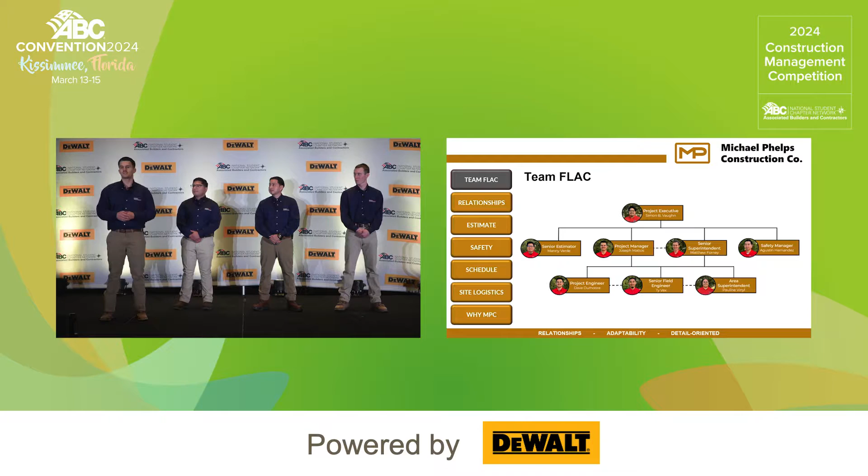First, we want to talk about our 45 years of construction and the relationships and the previous projects we've done. First, let's start with the Florida Aquatic Swimming and Training Facility. This was a FINA-accredited aquatic facility, and we worked with Weller Pools, our contractor, and Counsilman-Hunsaker, our designer. The team on the right were project team members from MPC that worked not only on this project, but are going to be on the FLAC project as well. So we're super excited to bring this previous relationship to this new project.

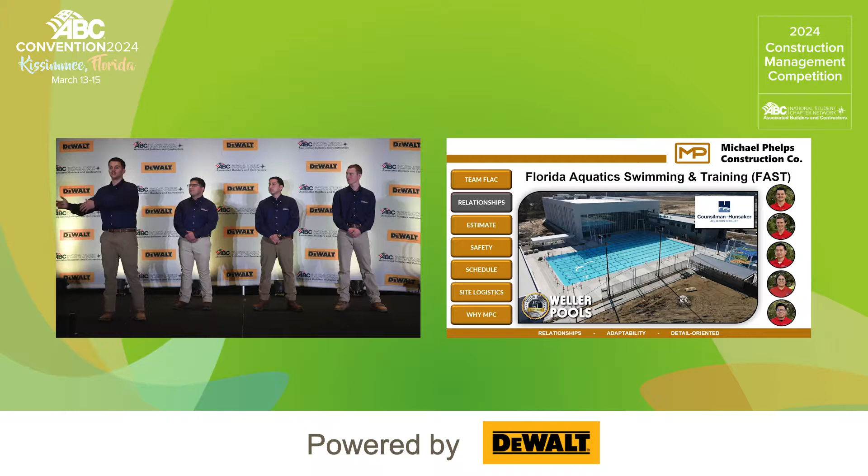Moving on to one of my favorite projects is the sea lion and puffin habitat at the Florida Aquarium. This super unique project was a demolition and a renovation of an existing habitat. And on the project, we got to work with WSP and Cartaya and Associates, our respective structural engineer and architects. During this time, both of these firms demonstrated their ability to adapt to any scenario they found. And we developed a beneficial relationship, and we are super excited to see them on the FLAC project once again.

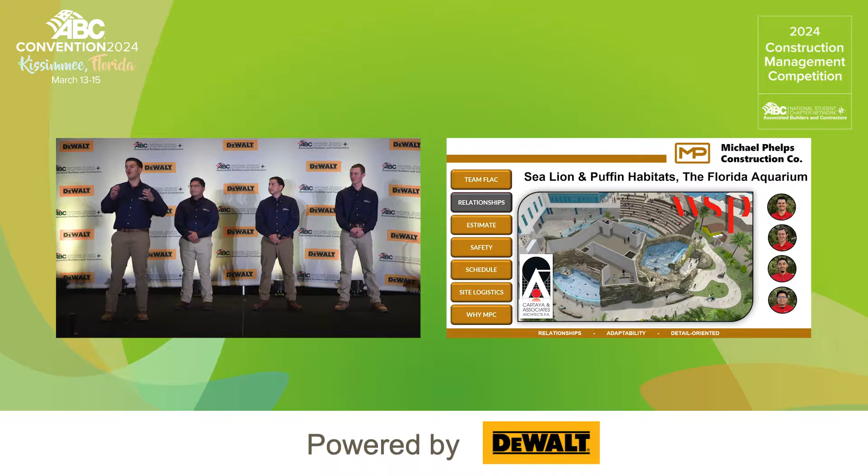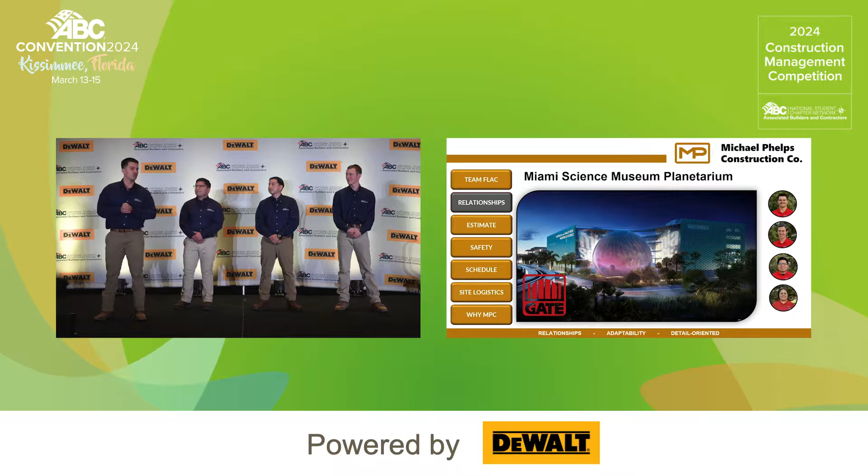Moving on to our last project is going to be the Miami Science Museum and Planetarium. This massive precast sphere, which is the focal point of the entire building, was constructed by our subcontractor, Gate Construction. And they did an amazing job at paying extreme attention to detail with all the compound curvatures of the sphere, which we are looking for them to once again perform on our 27-meter dive tower. And I want to pass the presentation over to our estimator, Manny, who's going to be discussing our estimate for the project. Thank you, Joseph.

Now the estimate, or like my mentor likes to say, the root of all evil. So here you see FLAC's total cost of $43,405,227. Now broken out into this donut chart, you have its respective percentages, broken out into the respective values located on the right-hand side. Our contracted work is going to consist of 63% of this total project cost. And then our self-performed work, which is going to consist of cast-in-place concrete and shotcrete, is going to be 13% of this total cost. General conditions would be 15, contractor's fee would be 4.5, and then bonds, insurance, and owner contingency is going to be 4.5%.

Within this chart, you're going to see our total cost broken out into two separate percentages. And the reason for that is because it represents the two phases. Phase one is going to be a little bit above $36.6 million. And then phase two is going to be a little bit above $6.7 million. Now with that being said, I'm going to pass it on over to Agustin, who's going to be going over safety. Thank you very much, Manny.

Hello, everybody. I'm going to be going over 4 different sections for safety today, so let's get started with the first one. Here at MPC, we have a zero accident safety culture, which is our #1 priority. In addition to that, we implement a lot of training for mental health as one of our top priorities as well. We understand that having those small conversations is going to have a big impact. You don't have to tell everybody, but you have to tell somebody. And that's going to allow us to get our employees or anybody who needs help to the EAP, Employee Assistance Program. We also have our Safety Award Program where we hand out some DeWalt tools. We also have raffles, swag, and some barbecues that are pretty damn good.

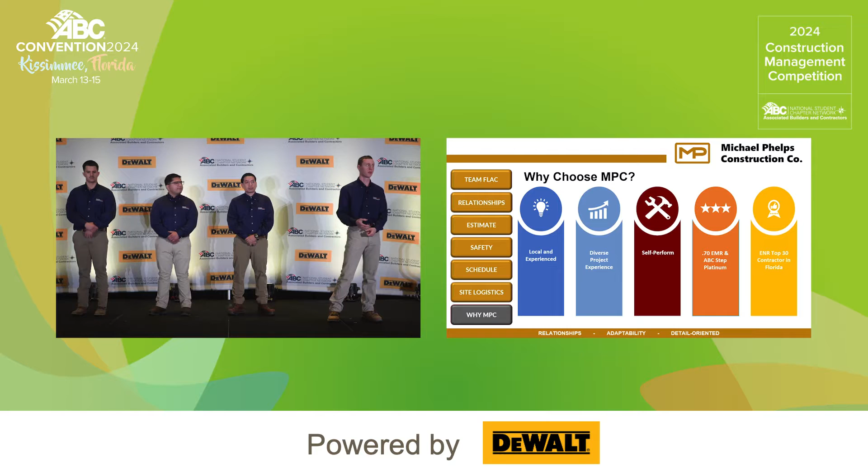Didn't see your plan for temporary power, temporary usage for water. Can you elaborate on what your plan is? Absolutely. So if we go back to the first site logistics plan, our temp power is located in the northeast corner. We're going to have a power skid there, and we're going to be putting all of the buildings on temp power via that skid, so that when we are doing all of our excavation and utility relocation, we don't have any utility strikes, and we can really minimize those risks.

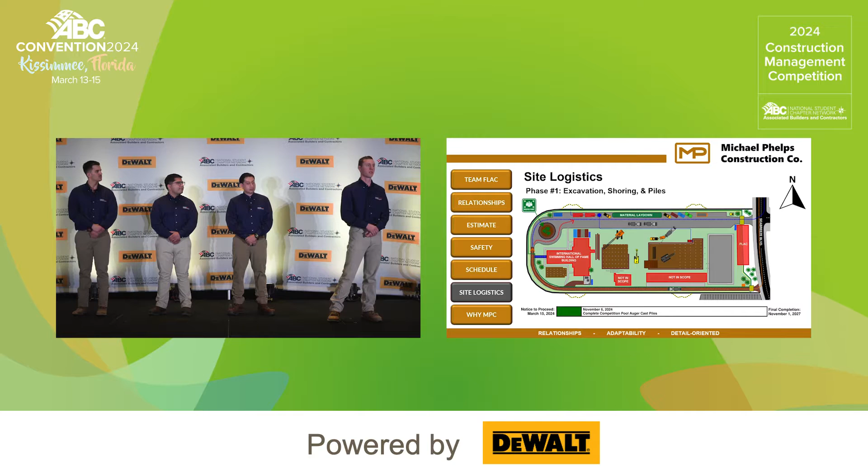In terms of water, during the demolition phase of the project, we're going to be using the fire hydrant water. We're going to get a tap from the city, and that's going to allow us to keep all the demolition waste wetted and have water on site for demolition. Thank you.

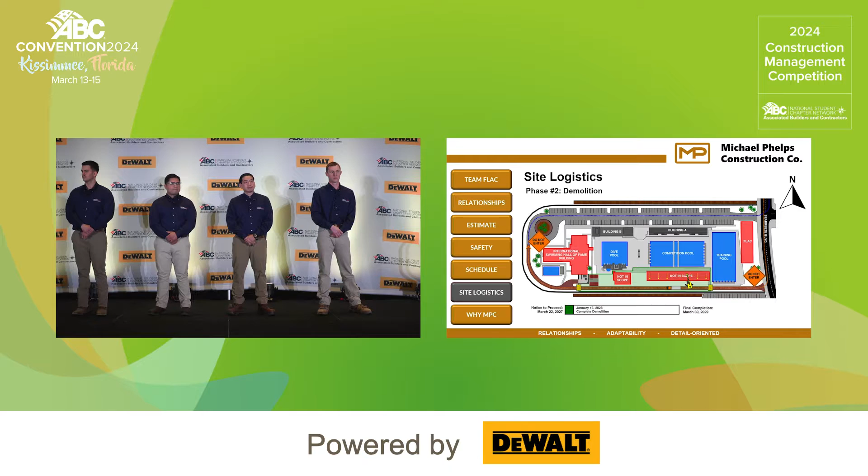Within your general conditions, you guys carry cost for a hazardous abatement review. Can you walk us through your plan if you do come across hazardous and abatement materials? From a safety perspective, that is a great question, and we're going to be working with Best Tech, one of the trade partners that we're going to be working with. They're located about 53 minutes from the site, and we're going to be reviewing their certifications, their submittal, and we're going to have a safety control plan for that. Obviously, we're going to be looking at the inspections and setting out those areas that are indicated. We've worked with them before, and they have done great work. Thank you.

From a quality standpoint, do you guys have anything in place to ensure that the AHJ guidelines and any regulations are being met? Yeah, that's a great question. And honestly, it goes back to our 7-step quality control process. We have identified every critical aspect for quality and making sure we pass inspections first try, so as to not delay and have rework. So step number 1 is going to be our buyout, and this is our buyout meeting. And in this meeting, we're going to be discussing and finalizing the contractor's scope of work and making sure they understand what they're buying out, as well as what we are expecting and how they should perform.

Next is going to be our coordination meeting, and this will happen maybe 3 or 4 months before they actually get on site. And in this coordination meeting, we're going to be identifying things like sample submittals, mock-ups, and any risks or items that the contractor views that should be mitigated before they start working. It's kind of just an early analysis of how we can prevent things later on. And then next we have our sample submittals. This is going to be reviewing the submittals, and once this is passed by our OAC, we're going to submit for procurement per the specifications.

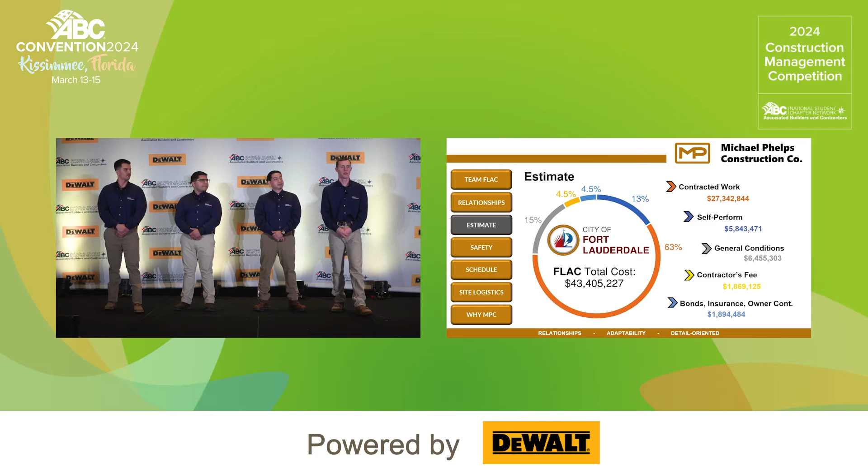What do you see as your biggest challenge on this job, construction phase-wise? Yeah, I'd say our biggest challenge is a lot of the schedule is on critical path. We have a really big duration that it's going to be running through, and there's a lot of work in congested zones.

And from a safety perspective, we have to break that out and hit zone by zone very methodically so we don't have people working over each other and we don't have trade stacking going on. And so with all the schedule on critical path, a push is going to push a lot of the activities since they're all reliant on each other for that linear path. So that's probably one of the biggest risks that we see at this time.

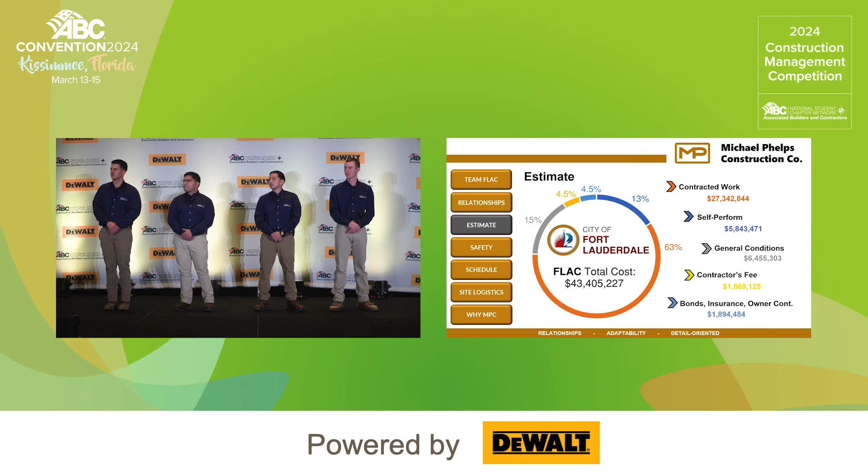What are you doing for safety when the boat show comes into town? What's your preparation to ensure, one, you don't have any unwanted visitors, and if someone does get on site, what are the precautions you're taking to ensure that no public is harmed? That is an excellent question. That is one of the main public hazards that we have identified.

So to begin with, we're going to do some great housekeeping. We're going to have MPC workers attending the show, monitoring the area. We also have privacy screens, and we're going to be controlling the dust prior to the boat show. We have the hydrant available, so we're going to be able to mitigate that. In addition, we have the signage, and we're going to be looking at our logistical components for traffic controls as well.

And we see this as an opportunity for MPC to show off our dedication to safety and why your decision was one of the best. Thank you. Additionally, we do have schedule durations for the boat show. We have it built into our schedule as a holiday, so we're not doing any major concrete pours or any activities that require a lot of off-site influence that could be obstructed by the traffic from the boat show.

So while we're talking about boats, you brought up the public hydrant several times to keep dust down, which is awesome. What about all the cutting, welding, and elevated work that's going to be happening on the dive tower? Do you have in your contingencies to cover damage to those boats parked at the marina, or is that going to fall on us as the owner?

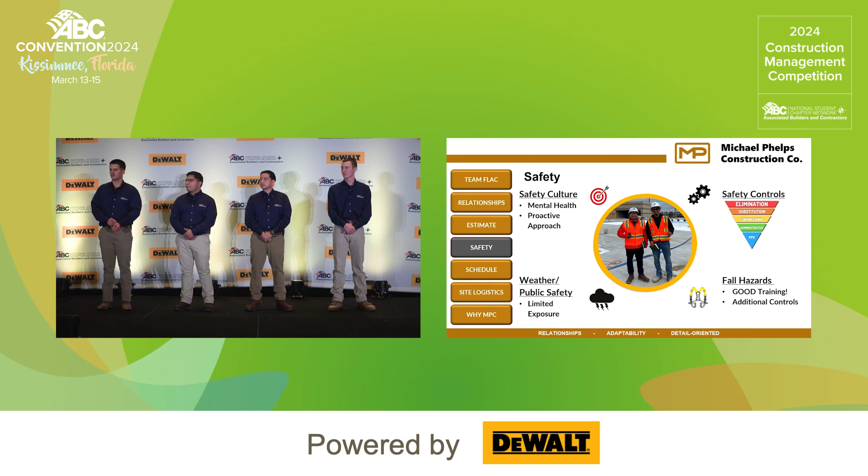Thank you. Does your schedule include any weekend work or shift work for any specific reason throughout the duration of the project? At this time, our schedule does not, but if there are any extenuating circumstances where we need to go to weekend work to maintain the schedule duration, our team's willing to do that.

With your expertise, are you seeing any labor shortages or have any concern with any of the trades? And if you do, what is your plan to overcome that for this schedule? Yeah, so having all of our self-perform crews is super important to drive the schedule because we know we can count on them. Our schedule is very linear throughout. We have concrete work going on throughout over half of the schedule, so being able to drive it through our own self-perform is going to be super important.

And then working with our trade partners, understanding any complications they have with staffing, and being able to lean on others is also going to be critical for project success.